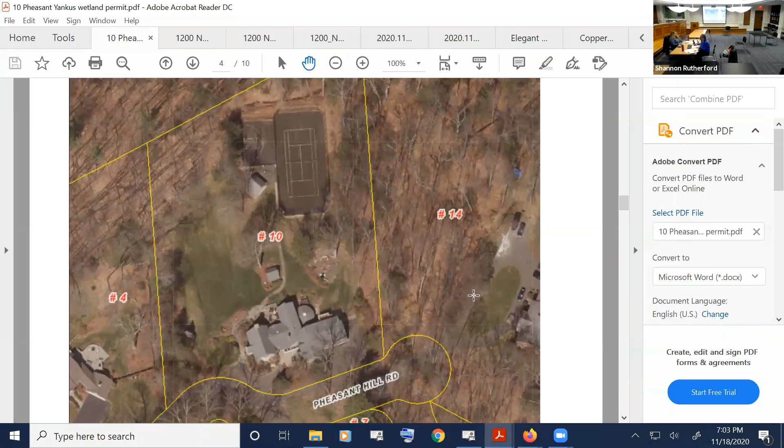So we'll do William Yankus first, 10 Pheasant Hill Road. Yes, and I can see James Morrissey, we've got James Morrissey, Bill Yankus, and Dennis on the application. I'm not sure who's taking the lead with this discussion. This is Bill Yankus, I'll take the lead, but for all the technical questions I'll defer to Dennis, who's going to be doing the construction. But essentially what we're doing, I'm the resident of 10 Pheasant Hill in Farmington.

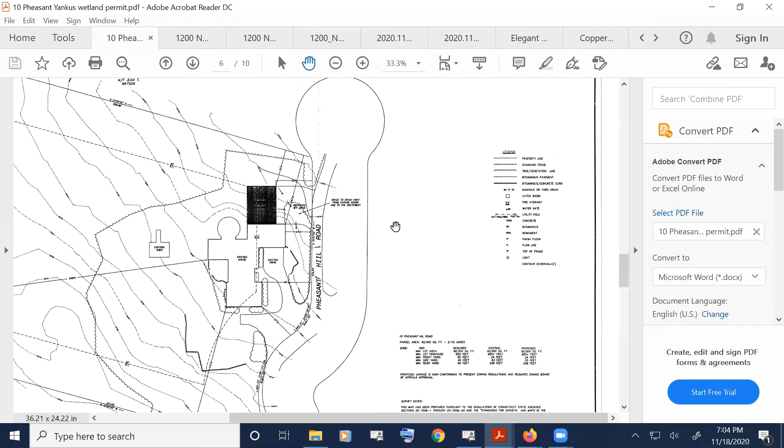We are replacing a 60 by 120 tennis court, which you can see in those drawings, with a 20 by 40 swimming pool with various landscaping, more or less very natural landscaping. A little bit of hardscaping close to the pool, but the amount of space that will be taken by the pool is significantly less than the space covered by the tennis court. The tennis court, by the way, was built in '95, well before I lived here. But I'll just defer to you guys and have you ask questions. I've never been through one of these before, so I'm not sure what you need to know.

Okay, so you had questions, right, Shannon, on the effect that we're doing with the property? Was that one of the questions? Sure, Dennis, if you wanted to speak to the construction practices before we turn it to the commission for their questions, you can certainly chime in at this point if you'd like.

Well, with the tennis court being removed, we will actually have a safe area because we'll be below grade. Obviously, when we take out the stone base and the asphalt, we should be down around 18 inches below the original grade that's there right now. And then what we were going to do is put up a silt fence first, and if we need to dewater as we're working on the pool in case of flood, but we know it's extremely dry nowadays, we would set up bales of hay, a silt fence, and a stone bed to run the pipe in so we have pure, clean water going out. We could run it into Bill's yard if need be, because he's got just over 2 acres there.

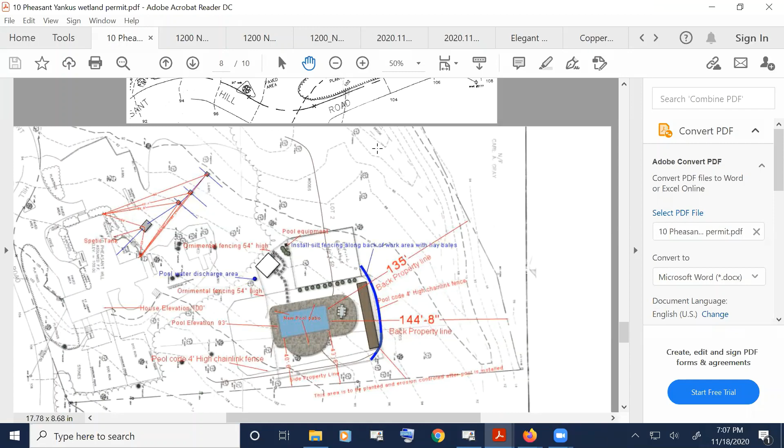Are there any wetlands on the property? Not really, no. There's a water course that shows up, and it shows up easier on the aerial.

This feature running behind the tennis court and basketball court continues off to the northeast, then southwest, crossing under Waterville Road, Route 10, and into the golf course. It flows north a little bit in the golf course and then meanders its way through to the Farmington River.

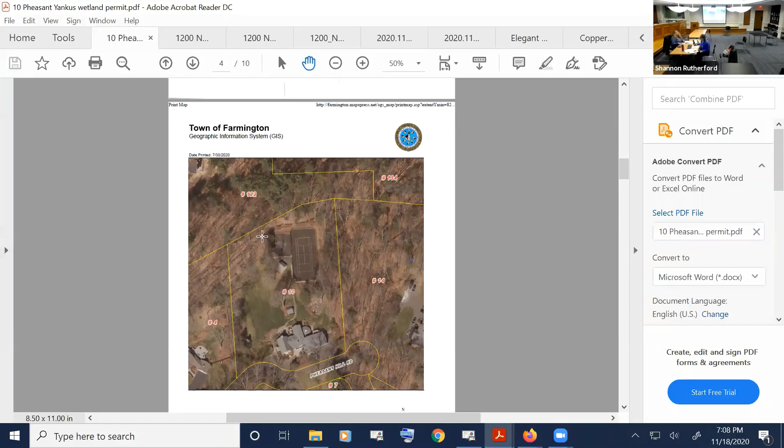But it's a drainage swale, a water course - an intermittent water course. That's the only question I had. Thank you.

I was wondering how far is that intermittent water course from the closest construction you're proposing? I guess the pool is like 56 feet away. And then the ground comes up 18 inches because the whole property, as you're looking from the road towards the property from right to left, continuously tapers.

So just like the swale and the neighbors' yards, everybody's yard just kind of keeps going downhill, that's the Pheasant Hill. So the closest bit, when the tennis court comes out, it's going to be within, I think, 10 or 15 feet of that swale. But that'll all be filled back in with vegetation within 56 feet, so instead of a 10-foot area to the swale, it's going to be a 56-foot area of vegetation, or not quite 56.

I think you have 20 feet of patio in there, Bill, something like that. Yeah, roughly. I think it should show on one of the drawings you guys have. I'm not sure, unfortunately, I can't see the drawings. So there'll be, I guess, 30 feet of vegetation versus 10 that was there before.

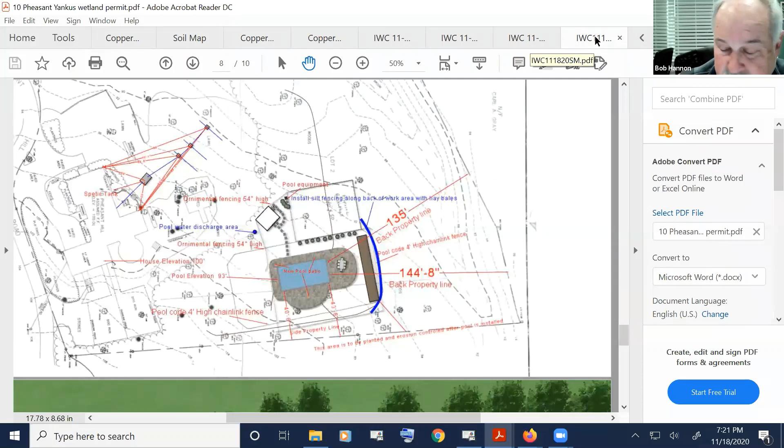At this point in time, I'll open it up. We'll go in order again, just to see what people's attitude is, how we want to deal with it. Rich, start with you. I would kind of agree with Bob that this should be permitted as of right. We're reducing the impervious area, we're farther away from the intermittent stream, and with the discharge point for draining the pool moved up and overland, I don't anticipate any impacts. So that's my 2 cents.

Okay, Dave? I agree with those 2 cents. Okay, Robert? Oh sorry, yep, no further comments. Okay, Ned? Yeah, I would lean towards this is a permitted use. Jay? Yeah, I'll go along with that too, it sounds like a pretty open and shut case to me.

So Shannon, we need a motion on this, right? Yes, please. Okay, would somebody care to make a motion to approve this as an allowed use with the condition of relocating the pool water discharge area closer to the shed? So moved, and with the additional condition that the property owner continue to work with the town staff. Is there a second? I'll second it, Ned.

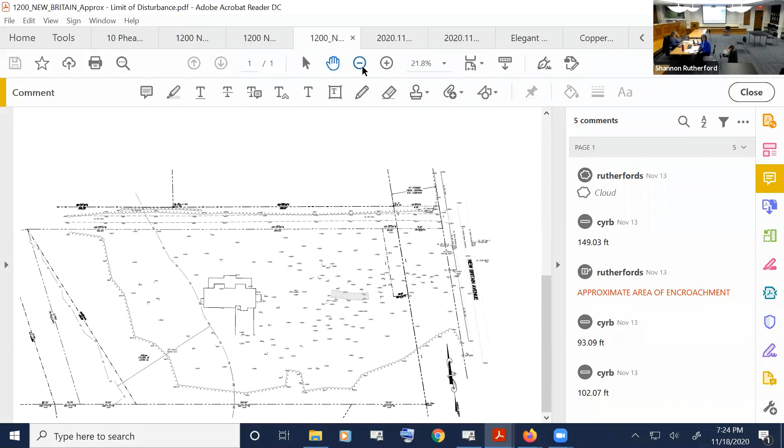This is the site plan that was reviewed and approved as part of the building permit application. There's a water course system at the back of the property that splits to the adjacent property and meanders between the two. There's a delineated wetland edge at the back, and a conservation easement at the back of the property.

In reviewing the building permit application and exchanging emails with the applicant regarding this, you can see the 150-foot upland review area. He had moved the home so it was outside the 150-foot upland review, and it was conditioned that the patio would not be constructed at this point in time - no work within the 150-foot upland review area. So Bruce has been out doing erosion control inspections as we normally would.

And when doing so, found that there had been encroachment into the wooded area. Bruce, I'm going to hand it off to you now. I don't know if you'd like photos at this point, or if there's more you want to talk about with respect to this plan.

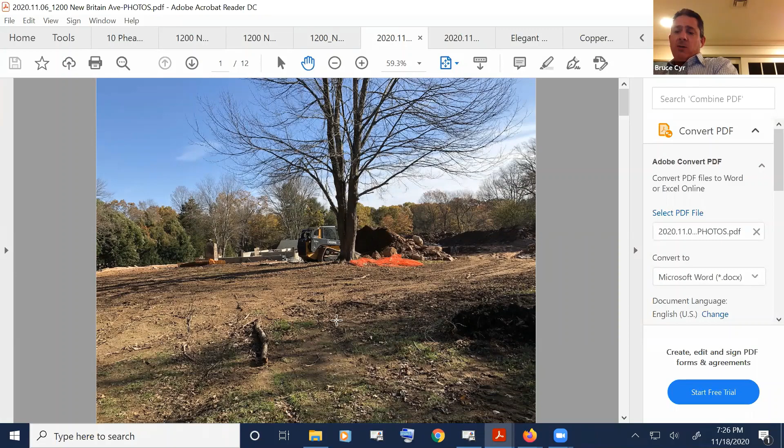There's that tree that's in the photo. If you scroll right through... that's the tree, turned around, and you can see how they went into that area there. I have some pictures showing the tape and the measurement I used off that tree, so that's more or less where it shows on the plan. You can see the tree stump and some cut brush.

From speaking with the owner, some of that is not from that area - it was from on site. They had done some work, and he actually said that area was previously cut and previously had deposited material. If you look, there was some older debris in there, so I tend to believe him that it was partially the previous owners. I touched base with the owner and explained to him what was going on.

We went back and forth. He said the tree guy had gone in there without him knowing. He told him to stay out of there and just haul it off, and they ended up dumping it in there. I think that's about it.

Okay. Bob, would you like to hear from the owner at this point?

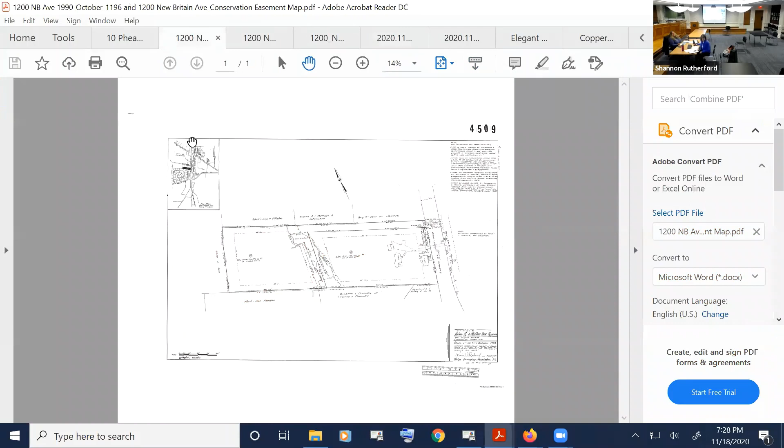Yeah, but I want to ask Bruce something, because in the pictures it almost looks like there's a bit of a pathway cut through there. Is that correct? As I said, the owner had kind of said it was an old dumping ground for the old house that was there. I didn't see any fresh cut trees that actually created that path.

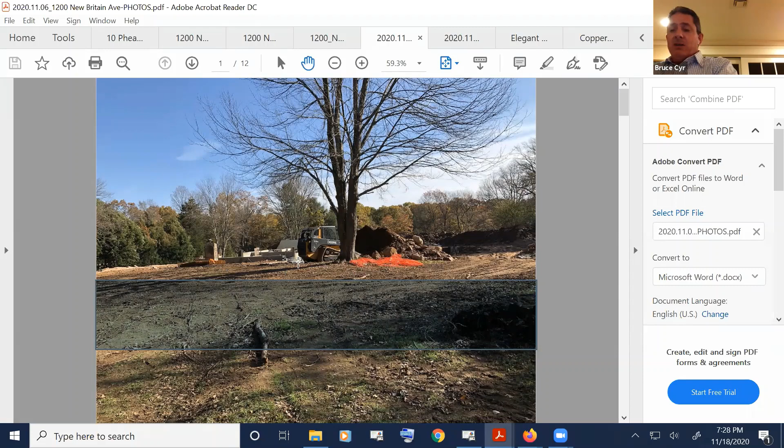I think if you look at some of the older pictures as we get in there, there is an established lawn area. If you go back a little bit, Shannon, back out to that tree - yeah, see, there is still a lawn area, and that's not all just fresh cut. As he said, there was some old stuff in there that the old owner was throwing in, so it probably was partially already disturbed.

Do we have any of the conservation plaques out there? No, this is an older easement - a much older easement before we instigated the plaque program. Okay, thank you.

Yeah, we can let the owner give a representation on their side of this. Robert DiTomaso, if you want to speak to this - I believe he's on the call.

Sure. Robert: I had a tree company come and cut down some trees, and we had some branches and some compost, and there was already a path there, so I put some of it back there. On the GIS map, there's nothing that shows wetlands when I did this back in the spring. Then on the 23rd of July, Shannon gave me this map that showed this old easement that I didn't know was there.

So I did put some material there, but there was already an existing path. There were hose lines, old wood, all kinds of stuff back there. I took some branches and dragged them back there just to clear them out. All the other logs and everything were already gone from the trees. I didn't cut anything back there, I just dragged compost back, which I can easily take out. No problem doing that.

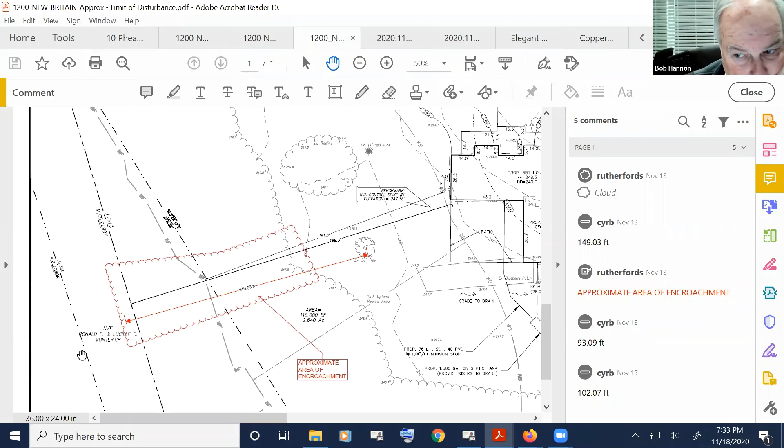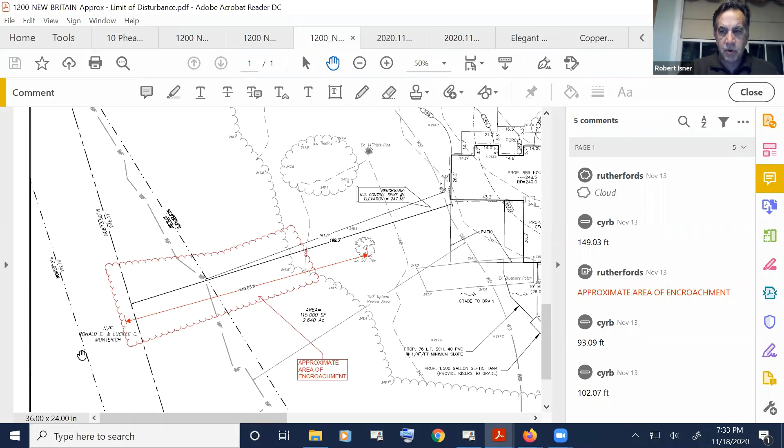Robert? Yeah, I concur, we would be looking for restoration of the area, remove the material that was placed. If there's any other solid waste - I think Zudi or Tom also said there are some garden hoses and other things in there - just clean out any other solid waste. And then it would probably be worthwhile to install conservation easement markers for the future.

That's all I have. Ned? Yeah, I think if it was just cleared - if any of the compost or material, the cut material, is removed from the area of encroachment, then I guess we could, you know...

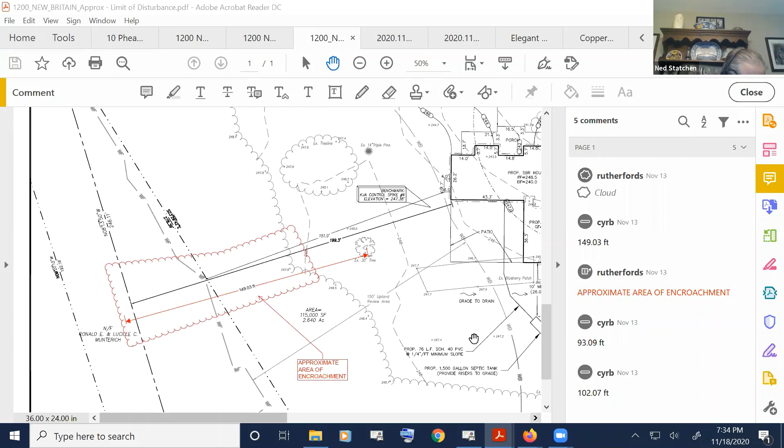So the location of the house - was it located to keep it out of the 150-foot upland review area, or was it just the way it was? I'm looking at the upland review line, because I know Shannon was saying don't construct the patio yet, because the patio is the only thing that encroaches into that line.

Am I? Yeah, basically that's what we did initially, because I needed to get this started in the fall and I wanted to start the project. The dates when you guys were meeting kept changing because of COVID, and I was really only within maybe like 4 or 5 feet of the area. So I just thought it would be easier for everyone if I moved it 151 feet, started the house, started the foundation, got everything ready for winter so I could start framing.

And then for the patio, it slopes the opposite direction from that conservation area. Shannon initially told me that sloping it toward wouldn't be a big deal - it would more likely need a board review. And then that got changed, and they wanted me to fill out a permit and everything. So I just moved it 151 feet. Okay.

And yeah, this everything slopes from the wetlands down to New Britain Avenue, right? Pretty much, yes, yes. Okay, that's all I have. Jay?

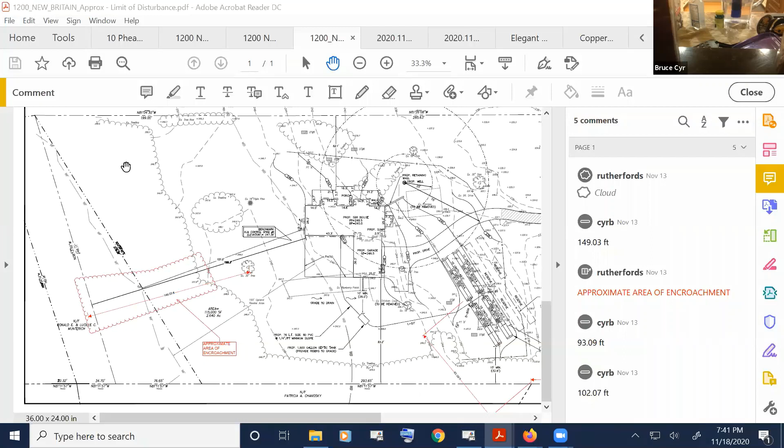I wouldn't have a problem. It's fairly simple as long as they're not going in there with heavy equipment. If they can do most of it by hand, I don't think it'll be that much of a problem. We can pull it all out and then they can dispose of it either off-site or chip it on site.

Okay, and then this also goes to Shannon and Bruce.

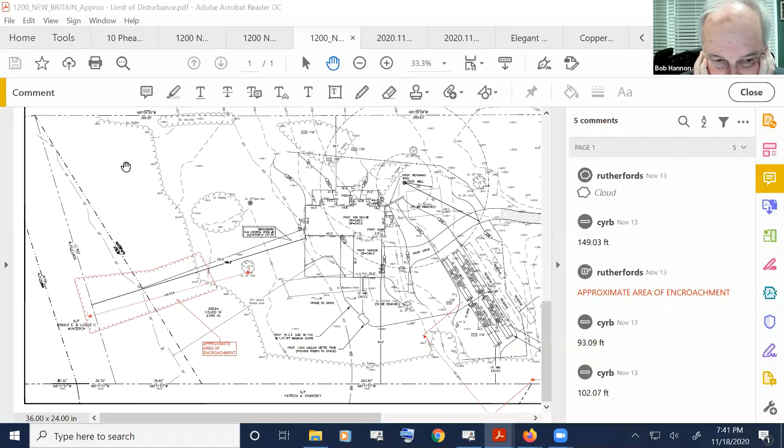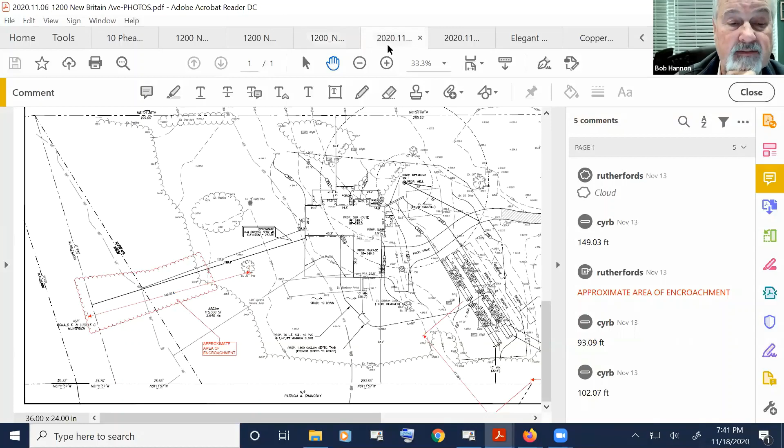If a lot of the material deposited in the conservation area is from a prior owner, do we need some kind of restoration plan? I'm wondering if a lot of this is brush that may have been brought back into the conservation area. There are some ruts and things in there that probably need to get raked out and smoothed out so we're not creating more problems. My concern is if that whole area is cleared out, what happens when invasive species start popping up in there?

I think we would want a seed mix. I'll be honest, I haven't been out here myself yet—things have been busy in the office, so Bruce handled it and we got it on the agenda to take advantage of the special meeting. I do have time later this week on Friday. Bruce and I have to be out at another meeting anyhow, so we can swing out here on Friday and take a look.

Looking at the other pictures, it looks like it's more of a forested area without a lot of understory. If there is any understory, it's smaller items, so we could have that removed and then look at having a few hardwood trees planted within that haul road area, so it's no longer used as a haul road. Then perhaps at the entrance, at the perimeter here, get some shrubs in. If we can get this path cleared with some hardwood trees and get it seeded, we should probably be in good shape. We'd want to take a look at the soils and look at a restoration mix to put in there.

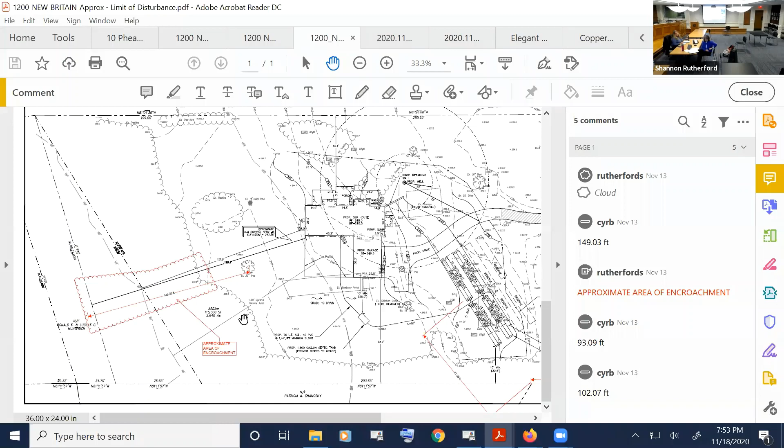Also, Robert, to follow up on that, I don't know if they've got any erosion control measures out there yet for the back area. I guess the slope is more towards the house, is that correct? Correct.

So it slopes away from the wetland area, it all slopes to the east. And in this area there's actually a pocket. As you drive by, you'll see a large stockpile of material in this area, but it actually rises back up to the road.

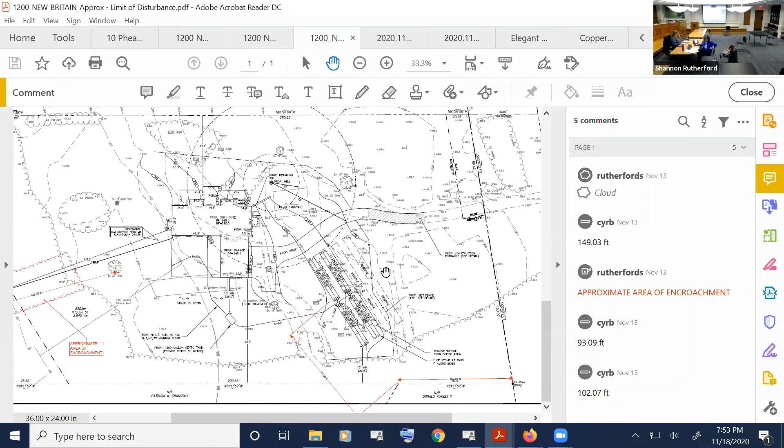I don't know that there's much erosion control on site. Certainly when we're raking this area out, we'll have some ryegrass put down so it's stable through the winter and spring, and some hay. But we'll do a full walk of the perimeter and have measures put in place if needed.

So, Robert, going back to your comment, is that something Mr. DiTomaso should work out with Bruce and Shannon in terms of how far back he can go to start moving some of the earth around to backfill the foundation?

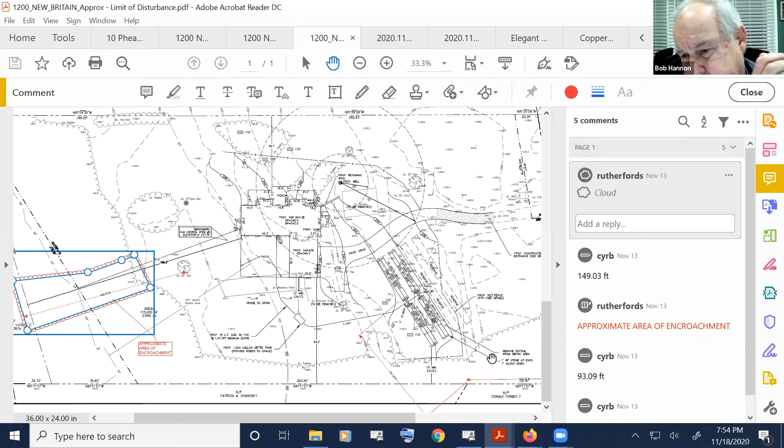You comfortable with that? Yes, I just want to recognize that clearly normal construction would have work occurring within the 150-foot setback, and I want to acknowledge that we know that is going to occur while the cease and desist remains in place.

Okay. So we have a game plan here? I believe Shannon, you and Bruce are comfortable? Yes, and if there are any issues, we'll come back here and talk to the commission. So I believe we're all set. Okay.

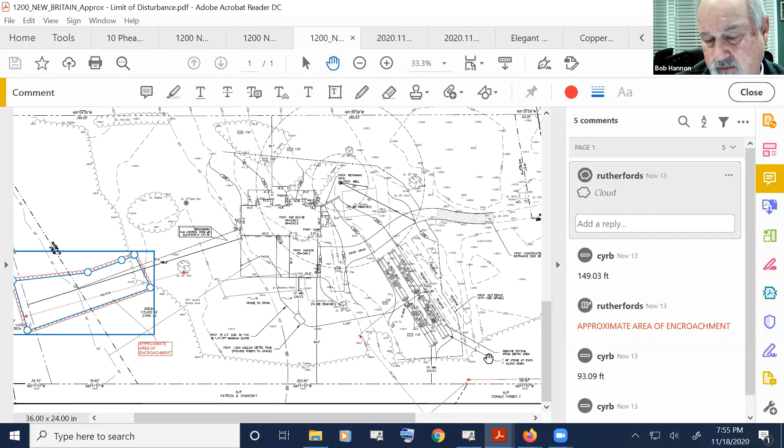We don't want to break it off. Mr. DiTomaso, do you have any other questions or comments? No, that's all. I'll call the surveyor and have him stake it out, and we'll go from there. So thank you very much. But you've got a pretty good idea of what we're talking about and what you can and can't do? Yes. Okay.

Okay, Robert, Bruce and I will follow up with you before the end of the week. Okay, thank you. Thank you. All right.

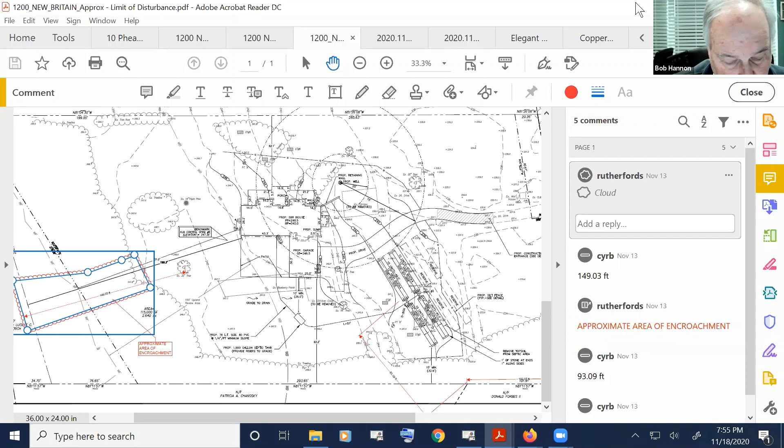I guess next up is the town with Coppermine Village. I guess they're right. Okay, I got a couple plans here.

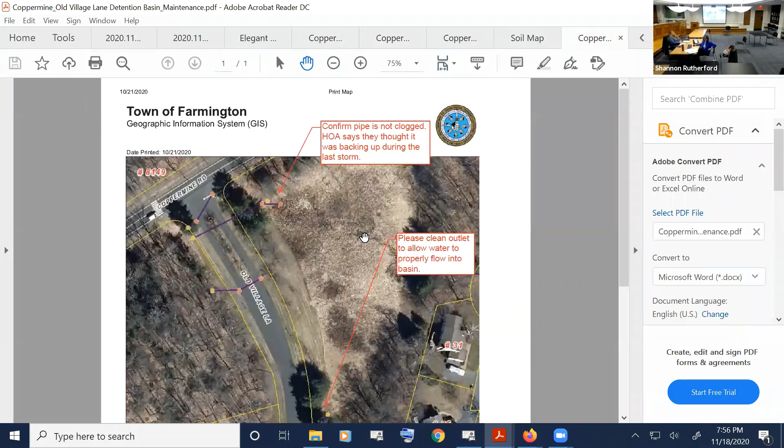There's photos, there's a soil map. Here we go. This one's probably worth a thousand words.

Back when I first started in October of 2015, one of the first things I discussed with the commission was Coppermine Village and the maintenance of the detention basins. This is their front detention basin at the intersection of Coppermine Road and Old Village Lane, and they have one. Old Village Lane winds all the way through the neighborhood, and there's a large detention basin at the rear.

It's typical for some homeowners associations that regular maintenance of these basins had not been occurring. We gave approval for them to start doing active clearing of these basins annually so they will function as a stormwater feature as designed.

I had included some of the original subdivision maps in my email to all of you, and you can see there are a number of outlets and inlets from the closed drainage system into this basin, and then an outlet out of the basin. So this is functioning and designed to function as a stormwater feature.

Of course, it was permitted in the early 80s, and originally it was evident on the subdivision plan that there was a wetland line that meandered through this front portion. As part of the approval in the 80s, they were allowed to construct the road and have this basin, a portion of the wetland, be converted into a stormwater basin.

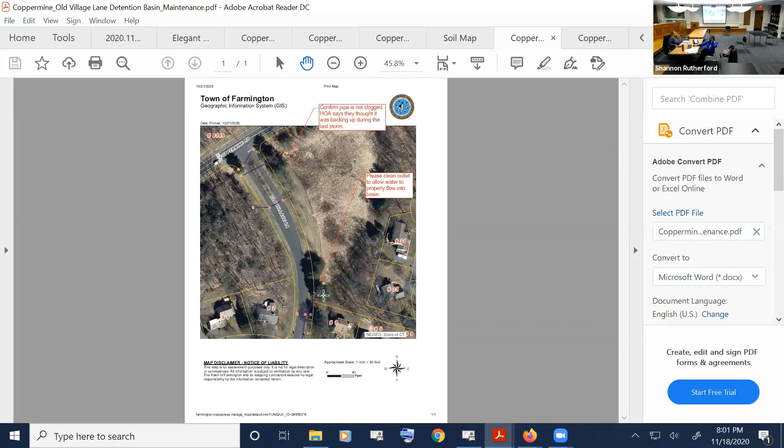What we'd like to do is reform the outlet. In order to do that, because it's so clogged here at the outlet end, they can't efficiently jet that line and push all that material out. So what we need to do is create a plunge pool area, remove some of this accumulated material, jet the line, remove the material that accumulates from jetting, and then reform and reshape a plunge pool area that was here and evident on the design plans.

And I do have the design plans here — they're one of many tabs that are open, but I can certainly pull them up and we can look at that. So the request is really to do this maintenance work in this detention basin so that the stormwater system can function as designed. The request is to allow this to proceed under maintenance for stormwater, or if the commission feels appropriate, accept the application and we'll finish the discussion at the next meeting if you feel an application is warranted and it's not a maintenance item.

What's the long-term plan for the basin though?

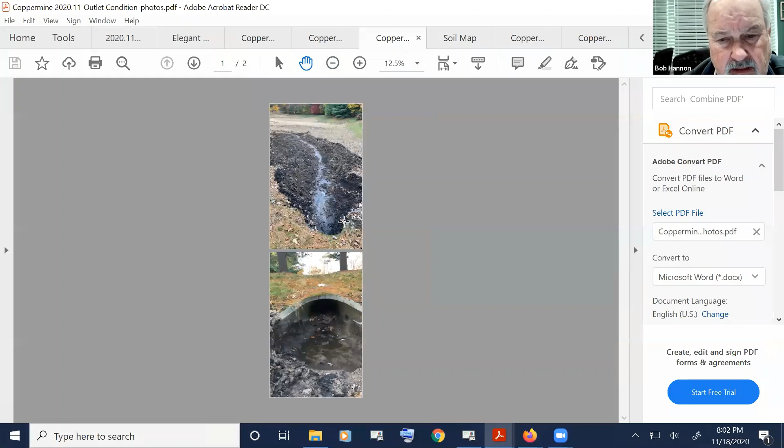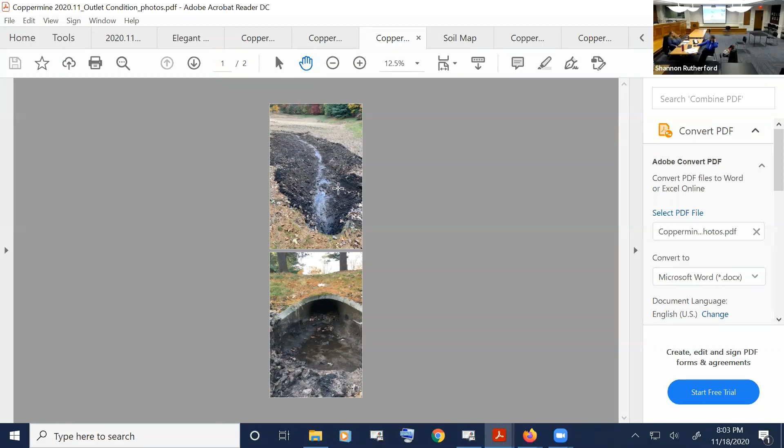So what we would do is create the plunge pool here at the opening, perhaps put some riprap in so they have better access to this, and reduce vegetative growth right at the opening. At this particular point, that's the extent of the work that's planned. Russ Arnold is considering doing some additional reshaping of this basin, but that would take place later on, and we'd come back for a follow-up conversation with the commission if that's the route they decide to go.

Because it's probably outside — even though the basin falls to the association's responsibility — it's probably a little more than what they can achieve on their own, so there's some discussions that still have to take place regarding that. The immediate work is to get the closed drainage system cleared out and make sure that outlet pipe for the closed drainage system that inlets into the basin is functioning properly.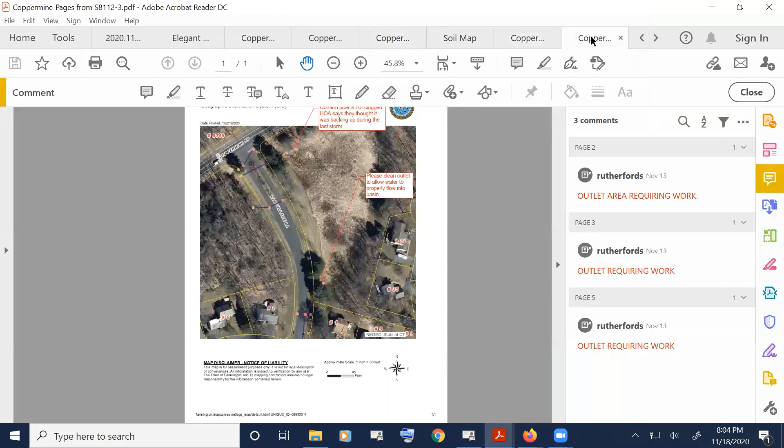Shannon, this is Ned. Did you say that originally there was a plunge basin for this and it just filled in over time? So we're looking to rebuild the plunge basin that was there originally.

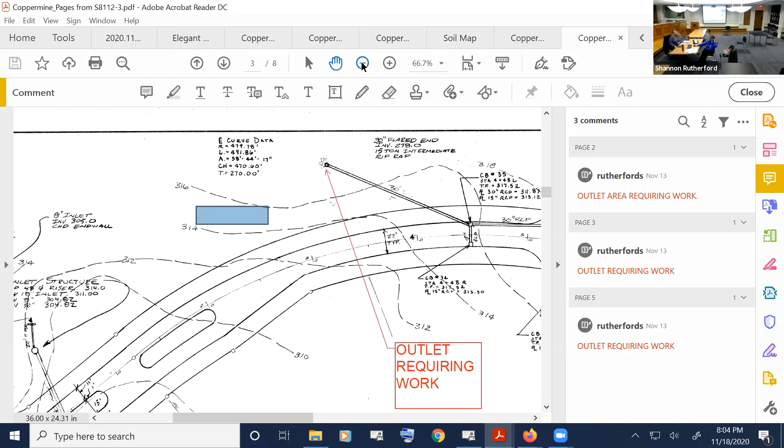Yes. The one at the side had a larger outlet here, and when you look at elevations, it actually should have had a stone outlet, probably almost a foot higher than the bottom of the basin originally designed.

Now, if it was constructed that way, keep in mind these are design plans, and unfortunately I don't have the luxury of having an as-built plan. It's entirely possible that this pipe is way up here and the bottom of the basin is 2 feet down, and they never went down to hog that out at time of construction, just put some stone in and called it good.

So all I have is the design plan to go on. You can see there is clearly a riprap pad, this outlet here has a riprap pad, the riprap here is visible. At times there is standing water here, and that does function as a small plunge pool area. The vegetative growth has come up around the edge of that riprap pad, but the stone is keeping the vegetation at bay, so you have a nice separation between the outlet and the rest of this detention basin.

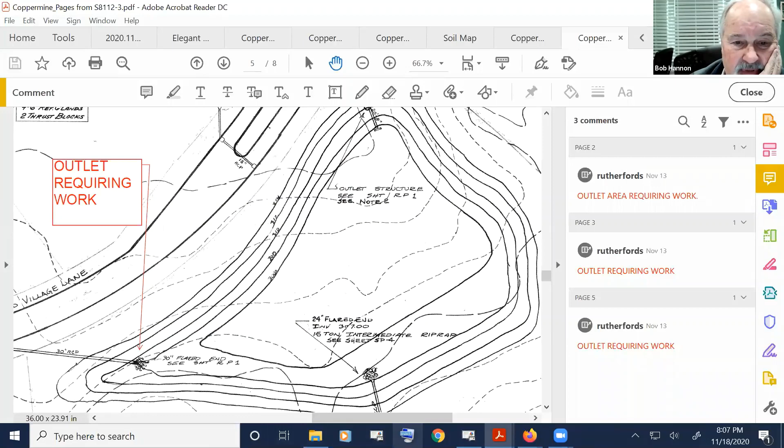I agree with you. So my ultimate question is, looking at the outlet pipe and the erosion going around that pipe, this is a 30-inch pipe, and there's not enough room for that water to even just flow out naturally. I'm assuming at some point somebody's got to come back and remove a lot of the material that's grown up here, because if this is at the bottom of the pipe, it looks like it could be a foot and a half of material it's got to go through.

So the detention basin has really filled up over time. So is it really serving the purpose anymore?

Yeah, thankfully there's decent head on this pipe, so the elevation difference from the catch basin and the invert at the basin versus the invert here is probably a 3 to 4 foot drop, so there's a decent amount of head on the pipe. And given the size of this, there's a large area for that water to disperse.

But that's one of the reasons - their landscaper that cut back the Phragmites just quickly by hand dug a little trench to clear that out so the water gets at least out into the middle of the basin.

Some additional long-term work likely needs to be completed, but even the basin on the side - that other outlet is roughly in this area - it comes out, has a plunge pool, and it's basically the same type of thing as that vegetative area. It's just the stone in that area is deeper, and the vegetation was kept at bay a little better, with the vegetated area coming right up to the top of the plunge pool area.

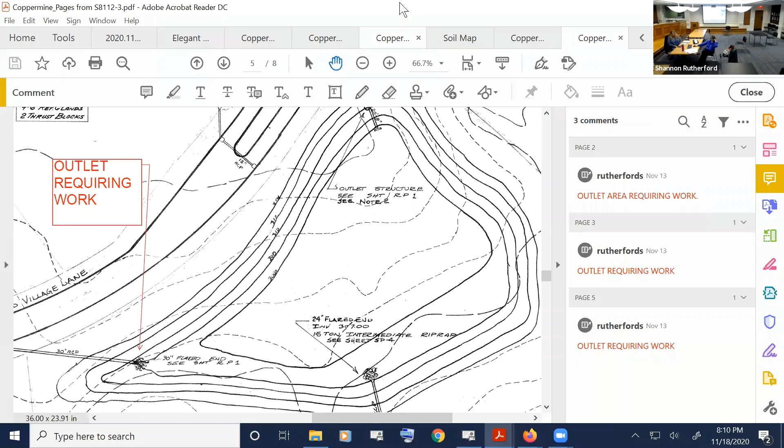So it's a unique hybrid situation. We don't see this very often, but that's what we have here.

And when is the town looking at trying to do this work? We would like to do this as soon as we're finished doing the leaf pickup, so we've got crews that should be available. We're looking at the second week of December, roughly.

All right, so I guess we'll just go through the list and see how everybody feels. Rich? I'm kind of feeling that this is maintenance work. I assume, Shannon, we're trying to create a little bit of a forebay area in this detention pond so that any sediment coming down the pipe gets trapped before it gets washed too far out into the basin. Is that correct? Yeah, we'd be able to easily access any material and get that removed. From my perspective, it's an improvement over the existing condition, and it's maintenance that probably should have been done years ago. But that's my 2 cents.

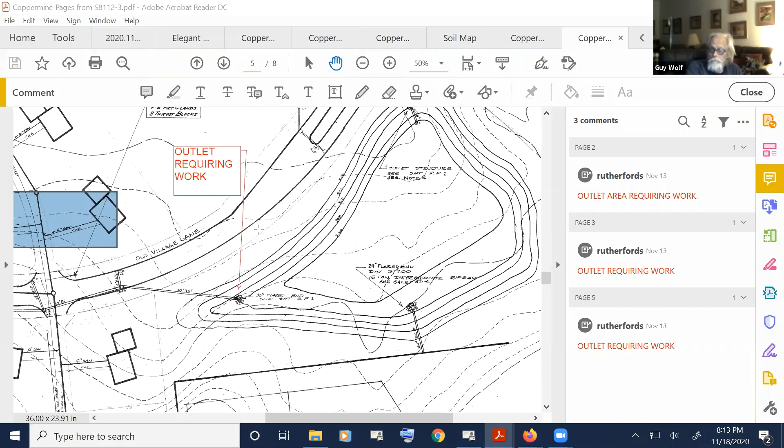Okay, and Bob, and Guy, I did see Guy's picture. So Guy? From what I heard, it sounds like maintenance to me too. I agree as well, I would just look at this as maintenance, and I'd be more interested in when more work has to be done out here and some of the grading or removal of some of the fill that's accumulated over the years — then that's a different story. But this, I think, is just more straightforward maintenance. So okay, I don't have an issue with it either.

Okay, thank you. Okay, we will proceed accordingly, and I'll let Russ know that it sounds like at least a favorable hearing for a long-term plan for this basin, and see if that's something we can get pulled together.

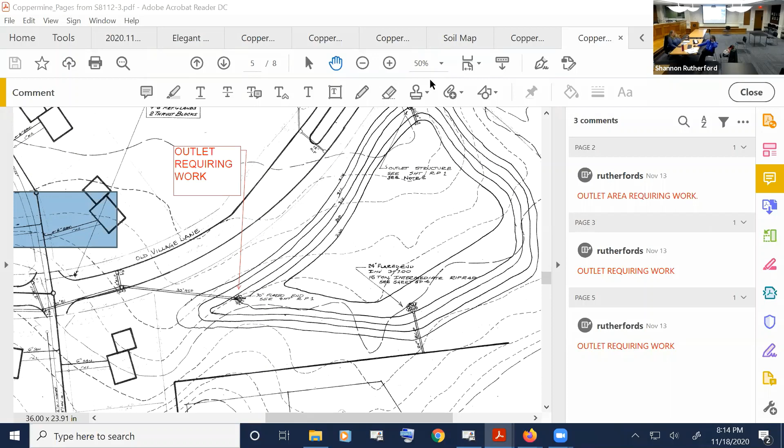Anything else you snuck on the agenda? No. Just checking. Yeah, and I don't have anything else for the planner's report. We've got a couple of Eagle Scout projects that I'll probably be taking a look at over the next couple of weeks, so you'll be seeing those here soon, but nothing else for this evening.

Okay, so next up is approval of minutes of the November 4th inland wetlands meeting, November 8th site walk notes, and November 15th site walk notes. Can I get a motion to approve? So moved. Is there a second? Dave will second. Any comments, corrections, omissions? We okay? Hearing nothing, those in favor? Aye, aye, aye. Opposed? Abstaining? Okay.

Do we need a motion to adjourn, or can we just hang up?

I just want to apologize for being late. I got confused on the date, I kept thinking it was tomorrow. No problem, Guy. We're gonna do it again in 2 weeks on December 2nd, and I think we've got a busier night on December 2nd, so no problem. Thank you. We don't have a conservation meeting now, right? No, this is just a special meeting for inland wetlands. Special meeting, right? Okay.